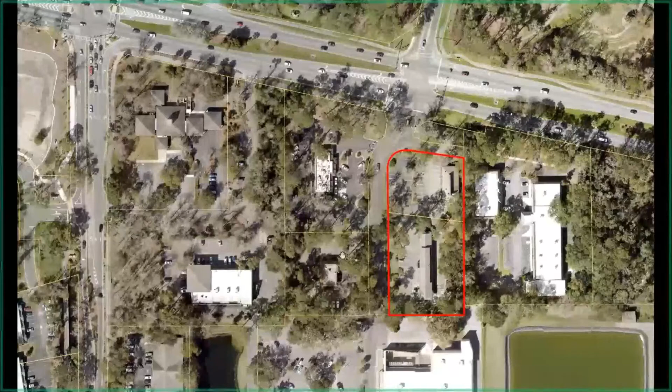We'll talk some more about that as we go on, but looking at the surrounding architecture: the old Sam's Club building, this is the oil change facility, and the McDonald's across Plaza Drive.

While this was not in your packet, the applicant asked that it be included in the presentation. It's just a colored rendering of the site plan to help illustrate the development plan. Again, you'll come in off of 278 right here, so when you turn in, you'll be looking down the car wash tunnel, and you can see how tight this building is to the right-of-way.

Of additional concern is this wall, and we'll look at the architectural elevations in a minute, but this wall of the building is glass, and staff is concerned that, as with any car wash, there's going to be lots of lights and different colored lights that reflect off the suds, and we don't know that that's the best elevation to put so close to the road.

It's also important to note that these are canopies, and up in the canopies house, it's staff's understanding, the vacuum hose and equipment. So this stuff comes down so that people can park in here and vacuum out their car under cover.

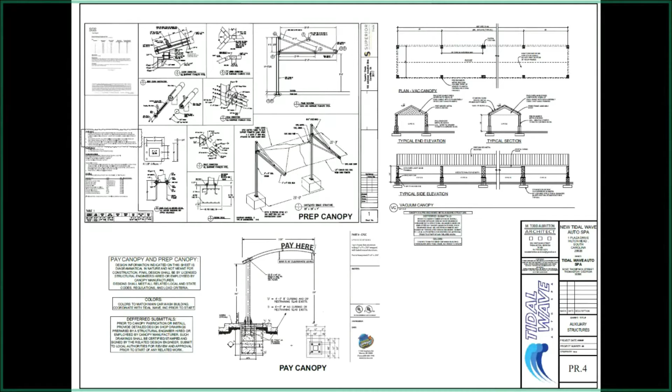An illustration of those, colored rendering. There are a couple of canopies around the site. The back canopy, there's a pay canopy, and then there's a prep canopy as you come around. We can look at the location of those canopies on the site. Staff is concerned because they're relatively close to the vacuum canopies that you see here.

This is that vacuum building where the equipment will be housed in sections, wall sections. Again, illustrations of the building and what it's going to look like. Again, the Plaza Drive side. This is the interior site. And then the end of the building.

So you can see the canopy, the pay canopies here as they arch out over, and how close they are to this building. This is the vacuum canopy, and then the prep canopy is right here, which is, again, cantilevered out over the drive.

So this is the demolition plan. Again, the old Pizza Hut building is here, Plaza Drive is here, and you can see the open bay car wash here. This is the pine that will be removed.

Proposed site plan. The only specimen tree, I believe, is this one. The others identified are significant, but the only specimen is this one. Again, the pay canopy is right here with that vacuum enclosure, and the prep canopy is here with the main building here.

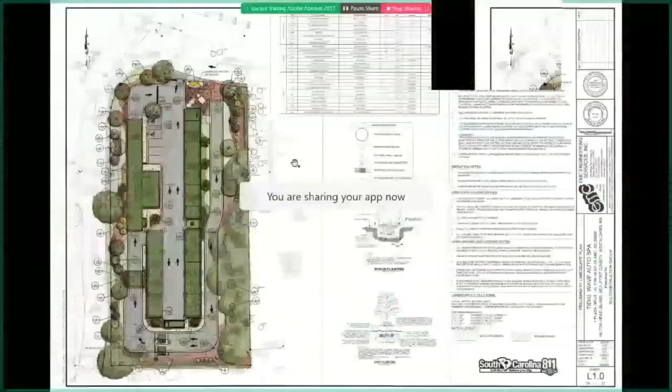...two very large vacuum canopies up against the access road, which is actually more roof line than the building. So you end up with more on that side. So I would pay attention to that as well. But we did look at all the environment, your utilities, your drainage, saving as many trees, providing the most canopies, and keeping this environmentally friendly as possible, also along with the traffic flow.

All right, thank you gentlemen. We're going to go through the board members here, so everybody hang tight with us. There may be some questions for you.

All great arguments, all great counterpoints, by the way. Personally, most of which I think I agree with all the counterpoint arguments. So, but we're going to go through the board, and I usually go last. So let's start with Ms.

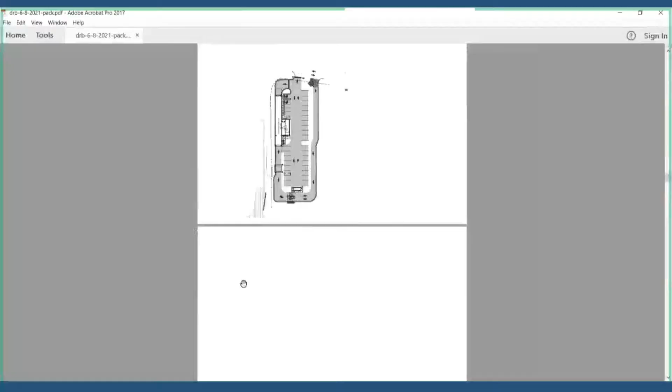Lippert. Thank you. I first have two questions for Chris. One being, I just couldn't quite tell on the drawings, the pay canopy — is that within the building setback line on the planned southern side of the site? I mean, maybe that should be a question to the applicant, but I couldn't quite tell whether the actual supporting element was crossing.

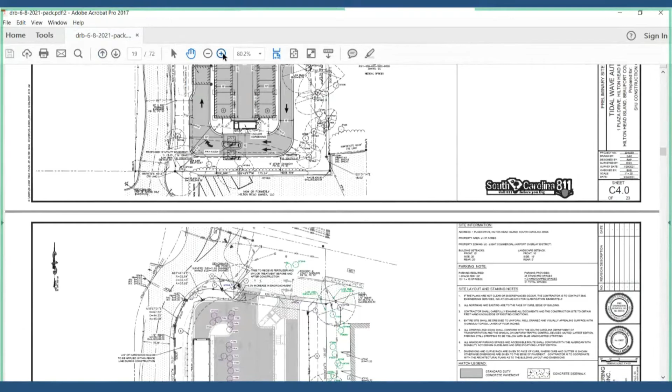And I'll just kind of throw out my second question too: I'm assuming it's the drip line of the specimen tree that's preventing just letting the whole project shift, let's say 10 feet to the east. I'm just trying to understand some of the constraints a little bit better.

It looks like, and Brian, if you clarify this, it's possible that it is possibly sitting in that, but I think there's room there to shift that over, that's what's required. So yes, currently the pay kiosk, the southern one, is encroaching into the 20-foot building setback. So, okay, to answer that question.

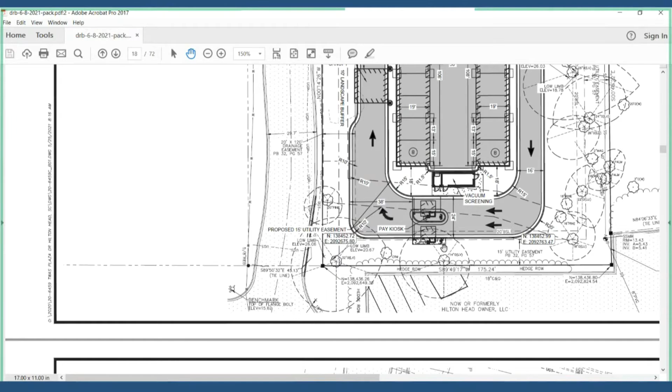The second question is, yes, we are trying to protect those significant trees that are there as much as possible, and just trying to keep as much natural vegetation on that side as possible to protect those. There's also quite a few drainage, sewer easements, and utility easements that run through this property, so we've put all that into effect, and the property does drain towards the right of the page to the east. Okay, thank you, so that helps me understand some of the constraints a little bit better.

Annette, this is Chris Darnell at the town of Hilton Head. Staff does not think that flipping the site plan will any further encroach on those significant and specimen trees on the right-hand side. Thank you.

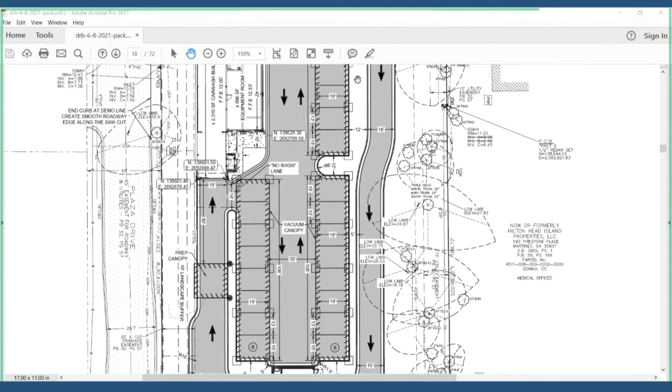I can definitely see in the elevations, and I'm going to spend most of my time on sheet PR.3, but I will start with just a couple of items in your responses to the pre-app comments. Specifically items 5, 6, and 7, as far as you'll hear me coming back to roof overhang dimensions, stone veneer replacement, and having proportions of the facade and facade elements that create a unified overall design.

So on PR.3, thank you, Chris, for moving to that page.

Like I said, I see the effort in breaking up the facade. To me, a lot of different architectural languages have been brought into this facade, and I'm not sure that it's really helping you. I think a greater study of proportions will help.

And eliminating some of the variety of what's going on. So I'll give you a couple of specific examples. At Conceptual, we tend to give you a little more general feedback, because you're going to tweak your design and bring it back for final. Looking at the east elevation, for instance, I'd recommend the Bahama shutters come down a little bit, come at a shallower angle, and just have it be a stucco plane instead of having a faux shutter covered by a Bahama shutter.

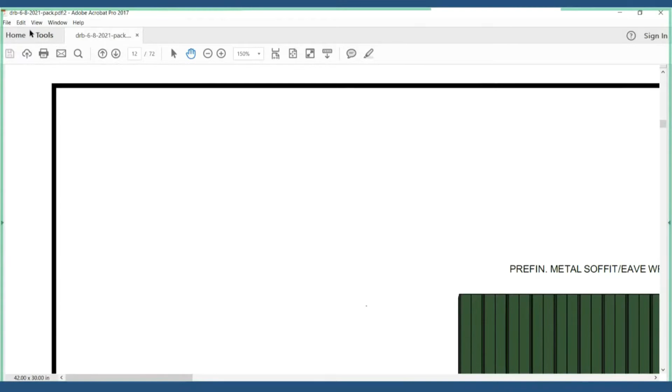So it is open bays that are, with the columns that are wrapped in the same facade elements as the rest of the tunnel. That area is what we call our loading station or additional prep area. The tunnel is closed off at night with roll-up doors that roll up inside the tunnel. So we close those upon closing of operational hours to secure the building. That open area remains open. That's simply just a covered, additional prep area for the cars before they actually go through the tunnel.

The operator's station that you see is where the attendant or the site leader - that is where the computer equipment is. That's where he can do any of his business, as far as handling selling club plans or any information that is needed for the site, housed in that operational booth. That is simply a computer housed area, not to be an actually occupied space.

Okay, that helps me understand the south elevation more. I didn't quite read that the roll-up door was actually inset, let's say, whatever, I'm guessing here, 25 feet or something. So that is an open sort of archway that remains open all the time at the south elevation? Ma'am, that is correct. I see, okay, that helps me with understanding the reading a lot more.

And yet on that south elevation, I think, again, we have a lot of different architectural languages, and I'm not seeing a whole lot of low country vernacular in this. I don't know that the composition of all these various elements - some archways with a voussoir, some arched windows, the glazing in the gable, the very short roof overhangs, the water table line that jumps up - I just don't... I also couldn't quite tell on some of the notes. I saw one note that talked about a smooth split face.

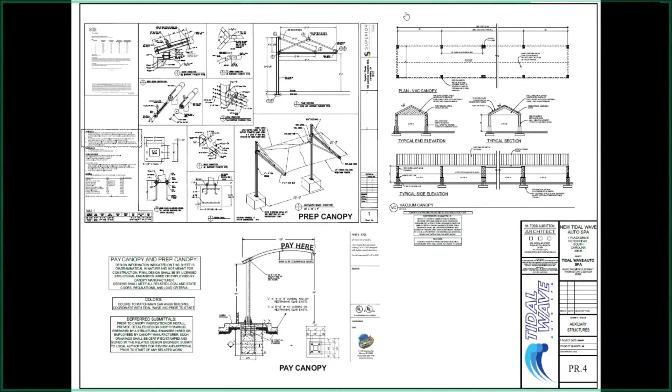So the vending, it's actually a machine that's recessed inside of our vacuum housing or our vacuum enclosure. That building that you see is just a machine that sits inside. It's just a vending machine that houses air fresheners, some little towelettes, items such as that. That's kind of complimentary for our customers to have that usage.

I would like to speak to the veneers and all. I know with Chris, we've gone through the veneers and put time into trying to create that facade that is appropriate for this low country area. As far as the split face block and all, and the water table, all those are items we can work through with staff. Since we have the comments here, that's items we can certainly work through.

I think staff will attest that we have accommodated most of the concerns brought to us as far as landscaping, the facade, because when we first came in, we had stacked stone and those features on the building, and staff said they'd prefer to use these buildings here for a building of influence, so we've done that. There's our building in Beaufort, South Carolina, which is a good reference of what a low country design would be appropriate for here as well. But to speak to your concerns about the elements, we certainly are willing to work through these.

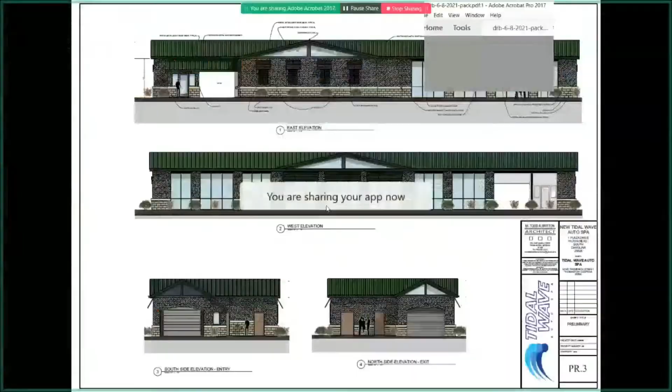On PR.1, my instinct would be to have the doors match the stucco color if it stays stucco. I know staff had recommended that the stucco become a Hardie panel and trim. I'm okay with the stucco as long as it gets some trim elements to help detail it, score lines, and things like that. And just being aware that the toilet room is going to need signage.

What is that really going to look like? The electric room is going to have signage. These facades are quickly going to start getting a lot busier than what's being represented right now.

I'm not seeing downspouts on, even though they have gutters called out. We have gutters and downspouts, and I would like to speak about the overhang of the eaves. As you're probably aware, the more overhang we have, it creates a negative toward our building setbacks. So we have to be careful, as if we're using this in our vacuum structure, in our actual building of operations and our canopies and all, we're greatly reducing our buildable space because of building setbacks.

Again, I'll refer to Beaufort, South Carolina. Very similar discussions that we're having now. Those elements of features were worked through at that particular location. I hear you and I appreciate that, but my responsibility is to get a low country vernacular and island character to be part of the project, and the larger overhangs are one of the essential features.

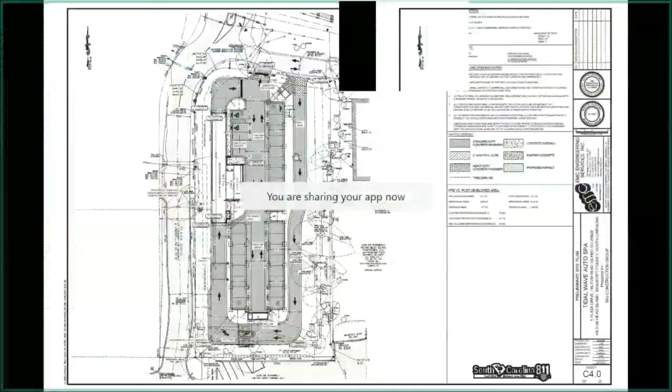Annette: I know this refers back to doing all these features. Again, if we mirror the building, we're doing a lot of these architectural elements only to be screened by the wood line to the east of our property—if we're looking at the screen, it'd be to the right. I want to keep that in mind, because if we mirror this site, you're going to see those canopies that are excessively longer than our building, and you'll see customers vacuuming their cars. All these elements we're putting focus on in this wonderful building we're trying to create will be screened or shadowed by that viewing.

Annette, did you address one way or the other the flipping question? Would you offer an opinion on that, please? Well, inevitably with my lead-in question, I had hoped we could just push it on the site, but I understand why we cannot.

I think the main building facade has a long way to go. Do I feel like fundamentally it can't be on that street facade? I would be okay with it on that street facade, but I do think that facade needs a good bit of work to get it into low country proportions and vernacular.

And I'll say this again: those are all items that I think are easily fixed. The overhang, working with staff, I think we can fix those. The split face block or brick, whatever, those are items that we are willing to work with staff on to address these concerns. Absolutely.

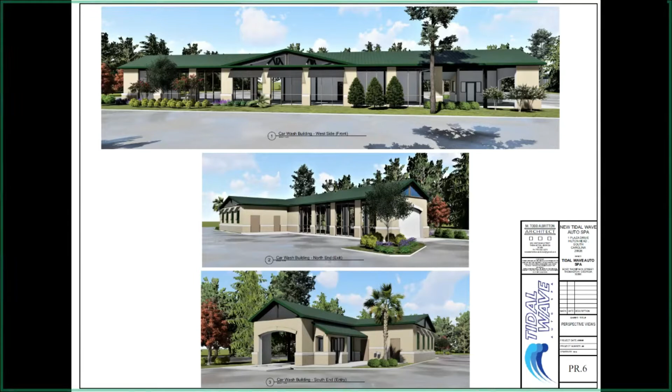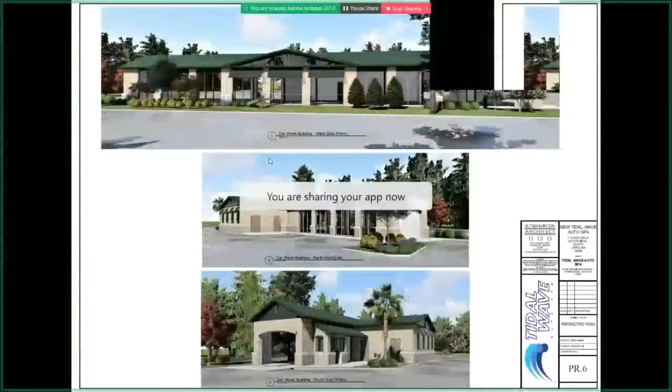I'm in support of what's proposed, part of the reason being the specimen tree that's over there and some of the significant trees, I understand. Also kind of concerned about the dumpster location. I'm already a little concerned about where it is now, and flipping it, I think that would be the very first thing you would see coming into Plaza Drive. You would see the dumpster.

I'm going to throw a comment out to the applicant, and I completely understand that you've got some challenges with the site being such a long linear site, and you're thinking about traffic flow and what it takes for a dumpster to get around. So it doesn't have to be a condition. I would just appreciate it if you could look for an alternate site for the dumpster. Only reason being is it faces and kind of activates the public. Be great if it could somehow be internal to the site, but again, I understand there's a lot of constraints with the site and it may not work, but if you could just look at it, I would appreciate that.

Also, I think Annette brought it up first with the setback encroachment — was that the pay kiosk at the bottom? And on my screen, it's hard to tell, but it kind of looked like the prep canopy also just ever so slightly encroached into the setback as well. And hopefully one of our LMO experts on staff can chime in on this, but I know we're trying to protect this specimen tree, and that's important and great, but there is a certain percentage of the drip line you can impact, and I cannot remember if it's 15% or 20%.

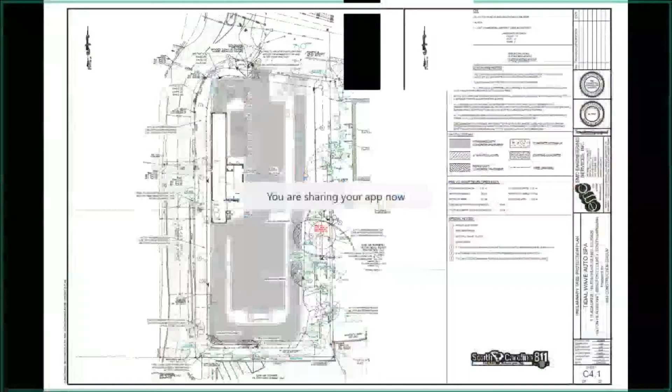And just switching gears to the landscape a little bit, since you are so close to the Plaza Drive setback and buffer, I would ask that we use some slightly larger evergreen shrubs in that buffer and along as the foundation for the building. Like there's one little stretch where, for example, we're using liriope. That's a ground cover, so I think we should be looking more at the medium 4 to 5 foot evergreen shrub size. I think that would be appropriate here. And it's pretty typical for us to request that people not use sod in the buffer. So I would ask that you eliminate sod in this, at least this Plaza Drive buffer. And let's just let that be a little more naturalized.

Yes, sir. We've gone through that with staff. I think we've addressed those, if I'm not mistaken. Is that correct, Mr. Chris? I think it was. I believe on the revised landscape plan you removed the sod from the buffer.

Yes. Okay. And just to note, David, the revised landscape plan came in after the deadline, and it wasn't part of the submission. But they have been working to eliminate that. Okay, great. Well, thank you again for working with staff on that.

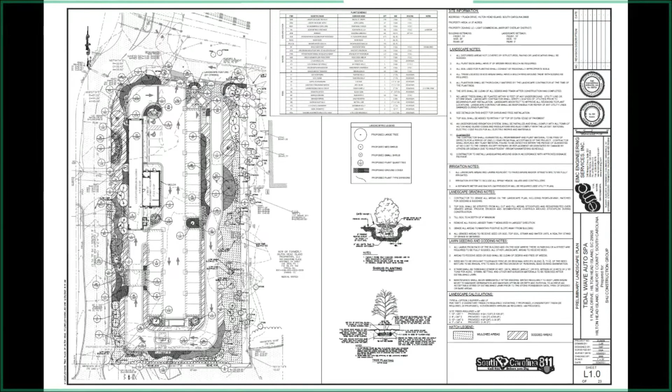Thank you, David. All right, Mr. Karstens, you're up. If I've got anything, I've got the benefit of time, so I was actually able to look at your Beaufort location just through the aerials and observe a couple things.

Marty, how many folks do you usually service there in Beaufort? How many customers do we service daily? Through the car wash, I would say, just an approximation, probably 400 to 500 daily.

Okay, I just wondered because I looked at the configuration of that, and it'll inform some of the things I'm going to remark on the site plan here. I will say on that particular one, if you won't hold it against me, the 90-degree turn at the exit of the tunnel is another factor, in that the ordinance and codes do not allow a bay door to be oriented toward, I think it's Sam's Point Boulevard, if I'm not mistaken. So that's where we worked with staff.

Staff said, look, we like y'all's business model, we think you have a wonderful looking business and we'd like to have you here, but I don't know how we can accommodate you with your design of building. So we went back - and that's a way to express how much effort we put into looking into this area, and how much money we put into this design and this business. We want to be the finest, nicest looking business in the community, and that proves our point that we're willing to work with your design ordinances to accommodate everything that's allowed through the constraints of the site.

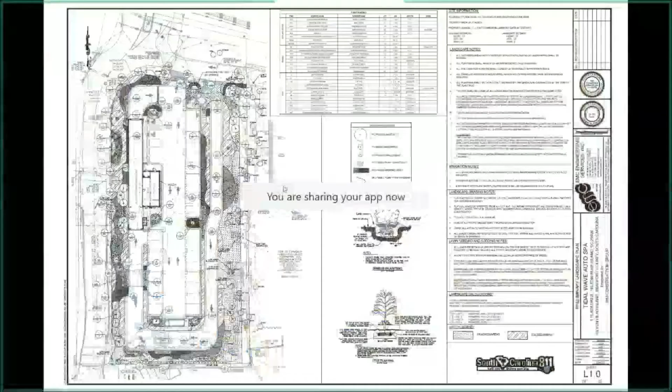Okay, thank you. I'm going to echo fellow board members - in regards to the building, I think the size of the overhangs would certainly help, and I don't mind the windows and glazing, but I see more of an opportunity for that water table to be a little more contiguous, especially on that west elevation. I think that will give a grounding to it, along with Mr. McAllister's comments about the evergreen foundation shrubs. I think those are critical along that park plaza.

Also, I'll echo David's request that you maybe study the opportunity for another location for the dumpsters. Looking at this, we're realizing it is the Pizza Hut and the existing car wash site - it's like 300 feet of property depth along that edge, so that drive and stacking drive is quite a long run. That being said, I'm in favor of how the site is set up right now. The two specimen trees we've been concerned about on that lower side currently reside adjacent to asphalt parking, so they're kind of encumbered, you could say, currently.

Now, I know the thought with the LMO and the desire with development is that we limit and reduce impacts. With my thoughts, I'm going to say there's an existing condition happening with some of these specimen trees that we could take advantage of in a shift to the east. So I'm in favor of the configuration, but I'd like to look at the whole thing shifting east, because there's a group of trees on the frontage.

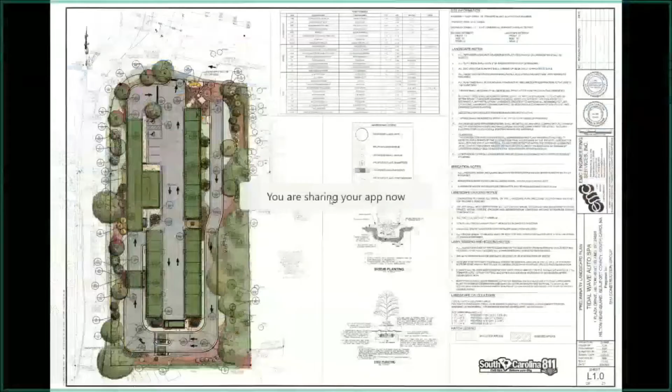Okay, just walk me through this a little bit. When we turn onto the property and go into the staging lane on the right-hand side, on the east side of the building, and go all the way down through the pay booth and come out through the tunnel, when we get out of the tunnel after the car is washed, then there is no vacuum service. It's strictly self-service vacuuming, is that correct?

Yes ma'am, that is correct, it's self-service. So coming out of the tunnel, they would make a right and come on down where I see both double lanes of traffic. I'm not really sure which of the canopies are the vacuum canopies, but let's say they come all the way down here and can't find a place to vacuum, they have to make a U-turn and go back up. Is that sufficient? It looks pretty tight in there. Yes ma'am, that is correct.

I can't see the distance between the face of canopy to the face of canopy. If I'm not mistaken, Brian, is that 28 or 30 feet in there? It's 30 feet between canopy, so you've got two 15-foot lanes.

That's acceptable. Yes ma'am. The other thing is, you pull into the vacuum center and then have to back out with all this cross traffic. So if you're having 400 or 500 cars, you're going to have a lot of cross traffic in there. Have you thought about how you're going to control that traffic in that tight space?

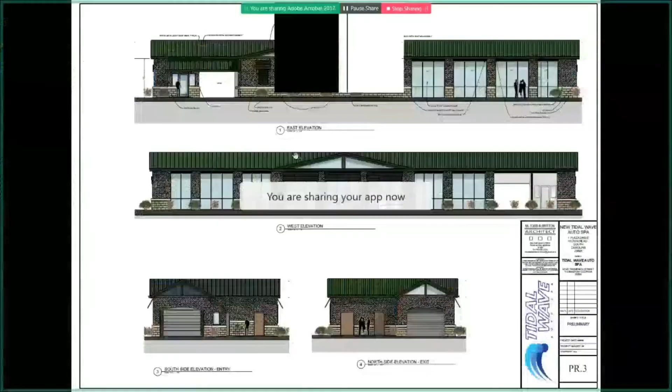I have a question for the staff and for the board. We don't want to constrain our drive aisle, and we'll certainly look into reducing that width. But is there an opportunity for an administrative variance of like 5 or 10% that could help us, if we run into a situation that creates problems for the customer experience? Again, we've read through the codes and feel like we're pretty close to what's required. This is just design elements we're willing to meet, but we're hoping staff or the community will allow us that opportunity if need be. I don't know that we'll need it, but just in case, I wanted to ask.

As David pointed out, you're allowed 20% encroachment into a specimen tree's canopy for the overhang. He, or Judd, also pointed out that the canopy is already impacted by impervious coverage, so you could actually maintain that impervious coverage to the extent it is right now under that specimen tree. We don't encourage that, but you could. I understand from your plan that you only have a little over 10% of the canopy impacted on that specimen tree, so there's room.

Okay, thank you. All right, good. All right, I think that solves that one.

Judd, you kind of lost me on the right-hand turn coming out. Does that mean you were saying extend the building itself that extra, whatever, 30 feet, and then make a right-hand turn? Yeah, the Beaufort store is 174 feet long, so it's an extra 40 feet that accommodates that right-hand turn out.

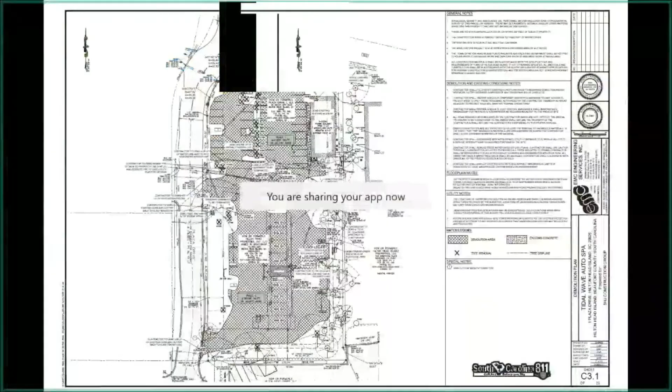If they were going to keep the building the way it is, I would want to see a lot more screening or landscaping on that corner coming in. But if they were able to accommodate an architectural feature that would help terminate the building, so you're not looking at the end of the bay, then that's much more agreeable.

Everybody made the point, when you come in and turn into this complex down Plaza Drive, you're going to be looking straight down at that entrance. See where that hand is? Let's close that off with landscaping, like lots of it.

I wouldn't want to extend the building anymore, because that gets back to the root comment staff had, that the building's not big, but now you're making it bigger and it's still close to the road. So I would not encourage making this building any bigger, and just really beef up from 12 o'clock to 9 o'clock on that corner with as much solid landscaping as we can get there.

Plus, trying to extend that building runs into the building setback curves. If you zoom in, you can see the setback curves, so you wouldn't be able to take that building out more than maybe 16 or 17 feet. So I would not go that direction. I would try to pick that up with landscaping instead.

I agree. No split face block. Let's go with a local brick appropriate for this area, or something like that.

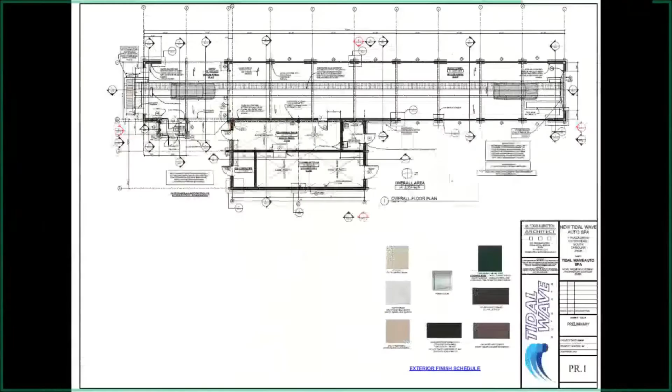So that's irrelevant. Can we go to the street elevation, which I guess is the west?

Agree with Mr. Molesky's comments and Annette's comments about those center three bays. Personally, I would not do that gable at all. I would get rid of that gable right there and just make it a standard bay. Because looking at the plan, all those are like 13-foot 6 bays, every single one of them, until you get to the ends.

You've got these little fatter pilasters, if I count from the left, 1, 2, 3, like that one. Yeah, that one's fatter, and the one mirroring it is fatter too. To me, it just doesn't need to be there. Those pilasters could be exactly the same as the others, and then those windows could be the same size as the others.

I would just make it a repetitive colonnade filled in with glass and get rid of the gable and get rid of the Bahama shutters. I don't think you need them. And then the ends are a little bit different. That will uncomplicate the building a little bit.

I agree with Miss Lippard's comments on the doubling up of shutters on the east side. You've got Bahama shutters and fake shutters. I'd just go Bahama shutters on that and get rid of the ones that are already closed. On that side, a gable makes sense because that is coming towards you, so I would just get rid of the gable on the west side.

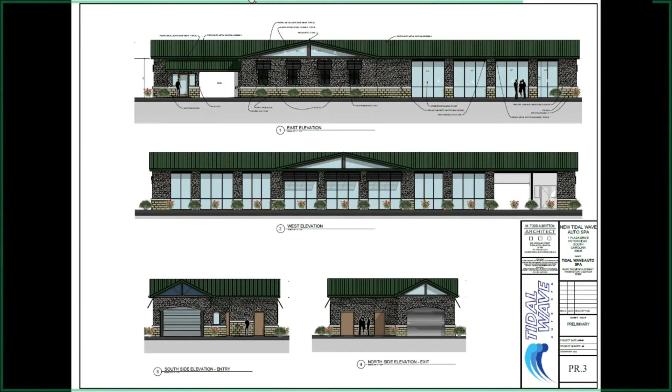So with that said, would anybody like a second turn at this? Ms. Foss.

I would like to just ask the question, what it would feel like if you flipped this exact plan top to bottom, north to south. That would pull that exit arch further away from the entrance and the street, and it might take away some of the traffic complications in and out.

Well, that's what Judd was saying, right, Judd? No, he was leaving it the same. It's a car wash, a drive-through car wash.

I think pretty much what Ms. Foss was saying is flipping the plan where, across the middle of it, you're coming in from the top and going down, just coming out counterclockwise. But I also was making the point of using the lane between the vacuum stalls as the exit for everything and not having that extra lane.

My comment is, what if you saw the ticket pay areas up by William Hilton Parkway? That would bring the section of the tunnel down further on that side, so we wouldn't see the exit right off of William Hilton Parkway. It would make people come down to where that bottom tree is to get in for the drive.

But we don't want people stacking on that outer road. Like if that pay kiosk is 30 feet when you come into the site, you're going to have potential stacking out on the road, which we don't want. They would have to come down by where the Sam's Club is and enter down there to get into this stacking road.

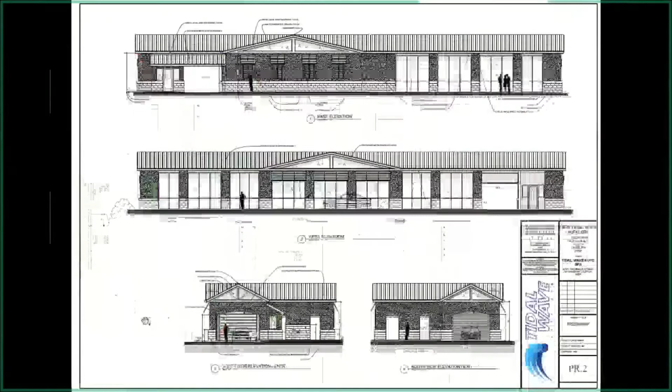You'd have to bring the dumpster, entrances and exits to the Plaza Drive side, or here on the southwest. I certainly think that if we looked at the aerial, there is an access point somewhere in that vicinity for the current car wash. So coming out, and I certainly like that idea.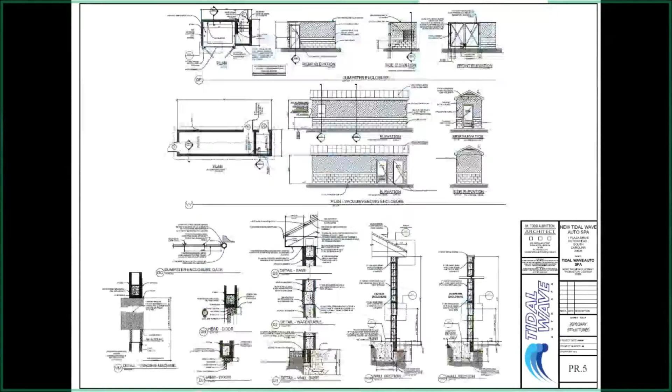Yeah, I mean, there's one right there, all the way down there. It gets it further away from the stoplight. It also takes it away from the McDonald's entrance and the lube entrance.

Yeah, that's the right heading east on 278 to go to Fiesta Fresh all the time. And that is not a great intersection there, because people come through that little alleyway heading, say, towards Sam's from the stoplight. They're moving pretty fast, and for them to quickly make that left turn is a potential problem.

Fender bender, rear ending. Yep. If they have a little more time to go down Plaza Drive and then enter there, I think that's a great point, unless somebody has a reason that wouldn't work.

Ryan, well, from the traffic flow standpoint, there's more trips being taken to behind us, right? To the Sam's location. Yeah, to that spot behind us. Yeah, there's less traffic going on the way we have it. That's one of the reasons why we did that, was to break up your trips within your overall development.

So there was some thinking going on why we chose that location. So, I would just remind everybody that there's no Sam's at Sam's. I don't know what's going to be there, and it obviously is a big box store, but there's no Sam's there now.

It has to do with access. It's almost like if they try to put a right in, right out off of 278, that would work brilliantly, but they're crossing up some traffic at a light that stacks. So yeah, that's a good point, because if you're leaving this development trying to get back onto 278, that's a pretty long light there. As far as Hilton Head goes, there's always 4 or 5 cars queued right up there at least, and that queue could easily block that left-hand turn for people traveling east on 278.

There's a right turn only lane there, right? And then you're traveling east on 278, you turn right, and you want to make that left, but there's going to be a stack of cars trying to get out of the development. I think, since Ms. Foss brought it up, that's a good point. Now, will it happen? I don't know. Hope everybody's a safe driver. But that's a 45 mile an hour road, 278, and people travel 55 on it. And when they make that right turn and they're coming down there quick and try to make a quick left-hand turn onto that outer road, but they can't because they're stacking, waiting for the light, I think that could create some problems. So that probably didn't make any sense unless you've driven it.

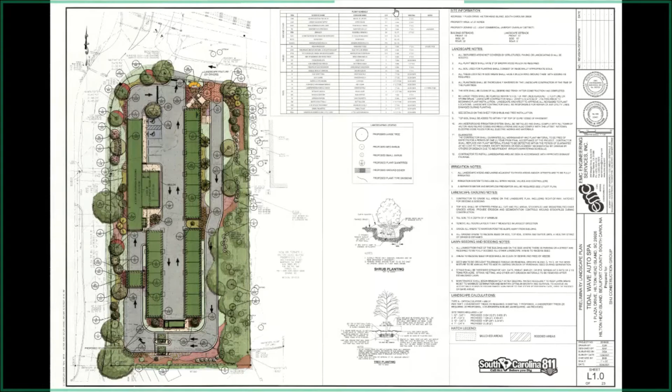Okay, well, in the interest of moving this forward - may I ask, sorry to interrupt, but are there any traffic study requirements with an expected volume of 400 to 500 cars a day that would trigger the need for a traffic study? This development, to my knowledge, does not trigger the LMO requirement for a traffic study. Okay, thank you.

Annette, I think the heartburn that I had was the fact that before, when it was a restaurant and a car wash, it had like 3 driveways off of Plaza Drive, and now those are being eliminated. So the idea is that all this traffic associated with the site is being concentrated onto this one access road versus being spread out across these other access points. And I think Catherine made a great point, that if we can use some of Plaza Drive to alleviate some of this potential backup or access issues, giving people more time to access the site, still utilizing the same site plan, but maybe just reversing the flow on that stacking lane on the outside.

Yeah, I agree completely, because I think the bottleneck is before the stacking lane, so the stacking is going to happen before the bottleneck, which is at that left turn. That's what I had understood Judd to say, not having seen the sketch. So when Ms. Foss said it again, I thought that was a similar approach. That's what I was hearing, coming in at the southern end of the site. So I think the bottleneck is before you get to that access road when you're coming off 278. So I'm definitely in favor of the southern access. Not ideal, but I'll give it.

Okay, the applicant is proposing the redevelopment of Benny Hudson Seafood. The new building will be constructed across the parking lot from the current market, in the location of an existing pre-manufactured home, which will be demolished as part of the project. Once the new market is built, the old market will be demolished to make room for the required parking lot improvements. The seafood processing and sales building will include conditioned mercantile area plus associated entry and covered porches. A delivery area behind the building will be screened from view by a wooden privacy fence. The parking lot will be improved as necessary to bring the required parking for the market to the LMO standards, to include handicap parking.

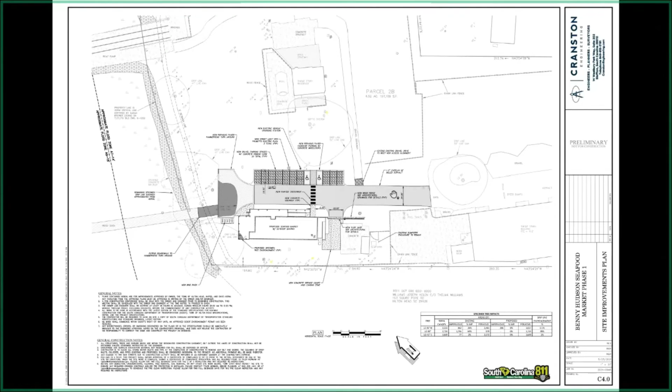So this is a survey of the existing conditions, proposed area for redevelopment, and the demolition plan, proposed site plan. So again, the new building sits right in here with the parking lot here. There's the existing residence that will remain and that drive that accesses it.

I believe this is that dumpster area that's to remain, we saw a picture of. Grading. Proposed landscape plan with the improvements requested at Conceptual, namely screening here.

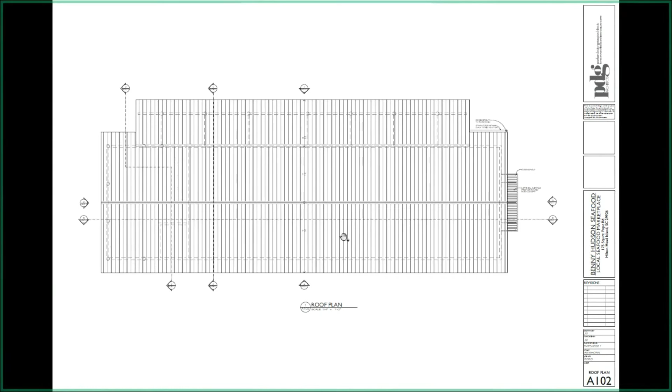Roof plan. I'm sorry, that was a building plan. Roof plan. Lighting plan for the interior and porch. Elevations of the building. Sections.

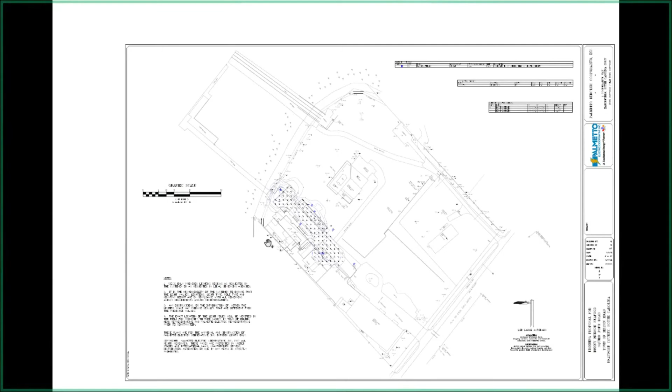Green wall detail. Lighting plan. This is a lighting plan for the fixtures on the building.

And I must say that after staff noted these, there was discussion with the applicant and the lighting designer to bring those into compliance. Fixtures, fixture colors, string lights - not technically... what am I trying to say? Not technically, they can hang those.

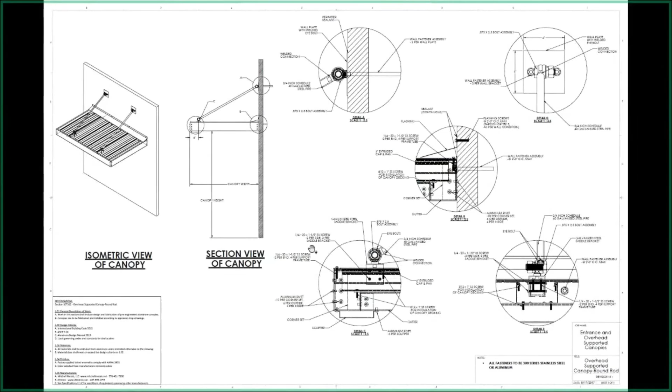Cut sheets for fans. Here's your canopy. Canopy color. And color board. This was the color board that was out. It was back, or later this week, or well, first of this week. I hope everybody had a chance to see it.

And that concludes staff's presentation. I would just like to add, with the exception of the body color, I think most of these comments can be addressed, or staff is comfortable addressing them at the staff level if the DRB so chooses. But the issue with the color - the comment, or the way staff understood the DRB's comment at Conceptual, was to make the building darker, and the proposed color did change, but it was not what staff considered a darker color. And that concludes staff's presentation.

All right. Sorry, couldn't find my unmute button. Thanks, Chris. Let's see. Oh, Joe, are you out there? There you are. Would you please identify yourself?

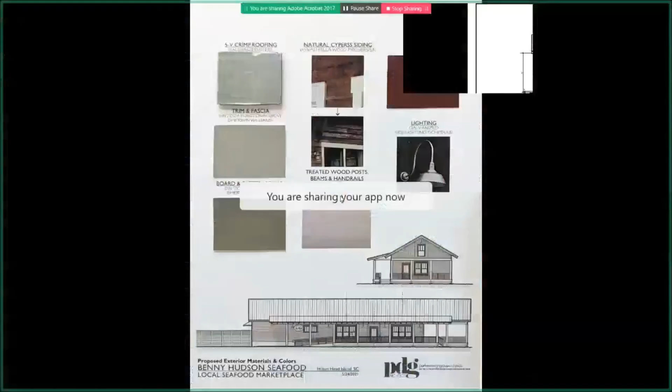Just for a point of comparison, the Lions project, which you all reviewed at the last meeting, which was the color revisions to the blue - their darkest color was 43, and their trim color was 62. So our trim color is darker even than their darkest siding. The backdrop is considered a dark color by Sherwin-Williams, and the trim color at 37 is considered a medium color on their color sample cards. So we thought those were nice dark colors, not too dark that they're providing harsh contrast to the natural wood tones we're planning to use, but really set up to complement those well.

And the trim color is a really nice complement to the stained wood sample that we have, that thatch color that we proposed.

Just to touch on the galvanized roofing, we think it's a really appropriate application, considering the maritime surroundings and traditional construction materials along the waterfront of all these other buildings. Galvanized steel is a weathering material, so the surface dulls over time. Also sitting in the shade of the tree canopy, those two things together soften the look, so it's not this bright, shiny thing that everybody has in mind.

This isn't Galvalume roofing, this is the actual galvanized steel, and it will weather to that nice dull patina look. It's really a unifying element of the maritime architecture along Skull Creek in particular. All of those buildings along there - the rowing and sailing center, the house we're tearing down - have a galvanized roof. The Hudson's Dockside, Skull Creek Boathouse, a lot of these projects were approved in 2013, 2017, and 2019. We think we're relating to that architecture, and that it's an appropriate use here, especially given the rest of the color palette.

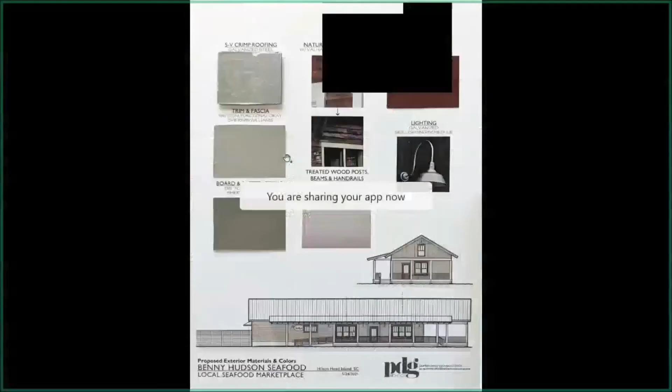Otherwise, I'll go ahead and comment on the roof. I'm not as sold on the roof as some of the others who have spoken before me. To me, it's as reflective of a roof as we've ever seen when I look at the physical color sample.

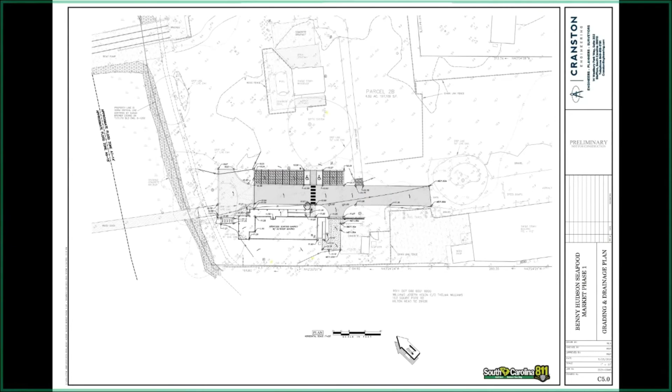I wish it was just a little more muted and gray. That being said, I know in your opening comments, Joe, you explained the intent behind it and that it'll weather and patina. Personally, I'm just not confident in what that would look like.

So I'm going to go with the rest of the board on this. I'm going to go ahead and say, personally, I think it's too reflective, but I'll also admit I don't know how that material would typically weather, the galvanized steel.

So I'm going to lean on some of my other board members, and if they're comfortable with it, then I'll support it. But I'm going to lean on them because I just honestly don't know how it weathers.

Because when I look at some of the example photographs of surrounding buildings, and then I look at that material, I mean, I took it out in the sun. It's basically putting a mirror up in the sun, but I understand that you're explaining it's going to weather a little bit.

So I'm not as confident about it, but if one of my board members can make me feel better about how it's going to weather, then I'll get on board.

That's really all I have. I think you've done a great job addressing comments from the previous meeting, so I'm good with everything else. All right. Thank you, David. Ms. Remke.

Thank you. I have no additional comments. I'm comfortable with everything. All right. Thank you, Debbie. Ms. Lippert.

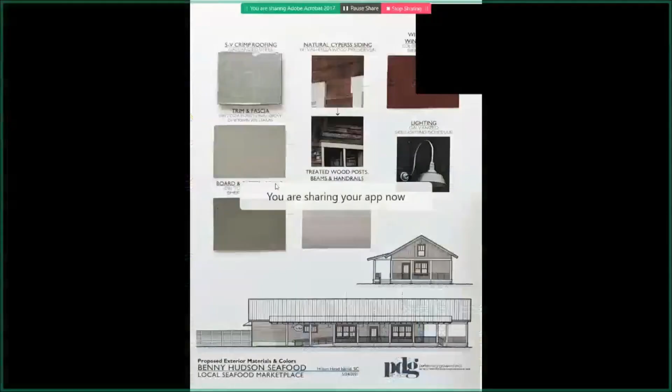So the corner boards will be the cypress as well. Okay, so good, those will also weather.

And then the board and batten is Hardie, so that's painted. Okay, I think that just wasn't clear to me, so I think it's just important, again, I may have missed a note or something, just to clarify that the corner trim is the same natural cypress wood siding.

On the right elevation, there is a sort of faux window, and I couldn't find anything that told me what was actually in place of where there would normally be glass. What is that material?

On the right elevation, so that is framed out of treated lumber. There's a detail for that in the details pages, and it just doesn't have glass panes in it, so it's an open window in the gable end.

Oh, it's open. Yes. Yeah, so it's framed to give the appearance of a window, but it's open, gives the ventilation.

That's built in place. It's not a window. It is a false window. So it's a sash bar with some vertical pieces.

So we have, let's see, we have like a 2 foot by 3 foot opening at the bottom, and then 3 sort of 2 foot by 1 foot openings at the top half.

Correct. So it's framed with a wood sill and then wood jambs. It's sort of, it's basically an old school site-built window without glazing.

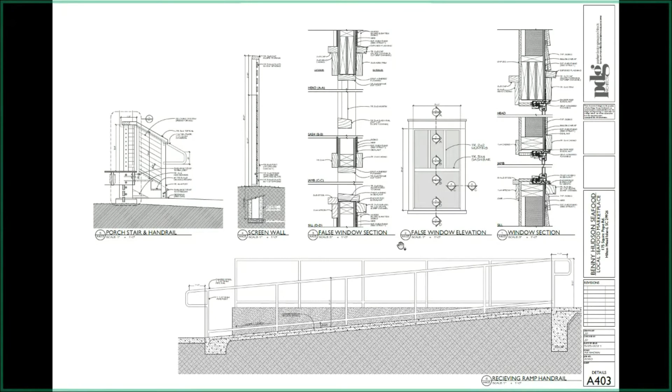Is there going to be a screen in there, or what's going to prevent animals from just going in there? Well, I mean, it's an open porch, so there's no screen. It's an open ceiling, so it's...

I see. Okay, just because, so we have an open ceiling in that area. On that right elevation, I called it a false window, but then countered it, so I was just confused on what was going on. Okay.

I'm curious to see if the rest of the board realized that was going to be just 3 pieces of wood in a 3 by 5 foot opening, and just see if anybody else has a comment on that.

I guess my other question on the left elevation is, I'm somewhat inclined to not have the service door be red, but I let myself get swayed, I guess, on that. Only because it's different than all the rest of the openings where I understand the red better. Again, I'll let myself get swayed by the rest of the board.

I am really pondering this open window for a little bit here. With regard to the roof, in trying to study some of the existing conditions, the crux to me of the matter is that it's indeed galvanized steel and not galvalume. To me, it appears that galvalume roofs are much more reflective than a true galvanized steel crimped roof. So because of that, based on what's listed on the drawings, I'm on board with the roof.

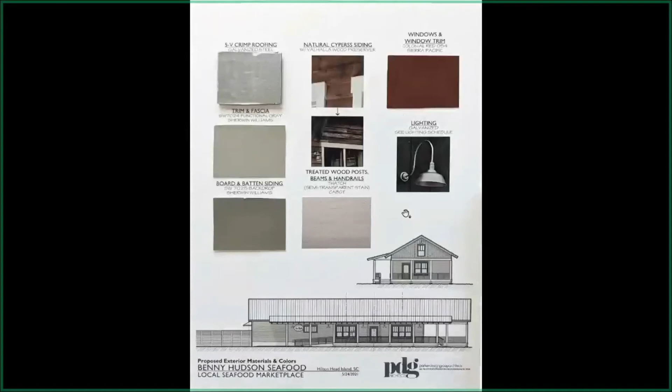Good afternoon, Mr. Chairman. This is Shay Farrar for the record with Community Development. Today I'm presenting to you DRB 1325-2021. This is a sign application from Sign Design for a new monument replacing an existing monument for Chow Daddies. The location of the monument is on the corner of Executive Park Road and Pope Avenue across from Wheels. Is everyone familiar with that location?

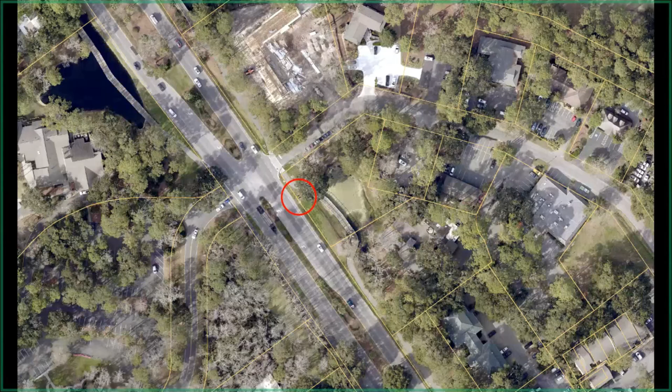The proposal is for a new sign that will replace the existing sign. The location was previously approved as part of a regime, so that is still in place and allows for a common element on that corner for the properties and the tenants. They will be adding 2 new tenant panels to this sign, and enlarging it will allow for that.

The new sign panel will be located between 2 new stucco columns. The sign face will be made of reclaimed wood and mounted between 2 columns using stringers and brackets, similar to the existing sign. There will be a wood lattice feature across the top. The sign letters will be a combination of existing PVC letters that will be reused, new PVC letters added for the Chow Daddies element, and new tenant panels that will be routed HDU with a wood grain texture.

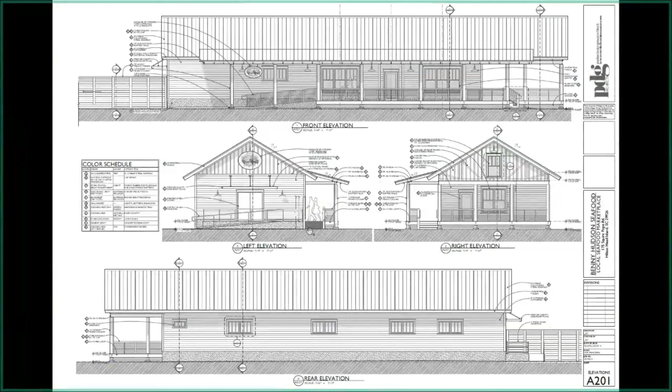Yeah, it says the topper and the tenant panels are -- if I could. Go ahead, Shay. Black fox is more of a gray than a black. Okay, perfect, then I'm good to go. Thank you.

All right, yeah, I think it looks great. It's within the 8 foot tall, which is usually my boundary for a sign. I don't think any sign on Hilton Head should be taller than 8 feet. But I think it's proportioned nicely, and it works for me, so I don't really have any comments.

So, Chris, we can approve, we can do our motion without the applicant present, right? Nothing. Yes sir, there's no requirement that they be present.

Okay, all right, so I'll go ahead and make a motion regarding Chow Daddy's DRB 001325-2021 signage approval with the following conditions. A landscape plan should be developed and included in the sign permit approval. Landscape plan to be approved by staff. Extra care and additional landscape should be included due to the increased size of the signage, and again that approval is at staff's discretion. And the tenant sign panels should be concealed cleat mounted instead of exposed fasteners or screws.